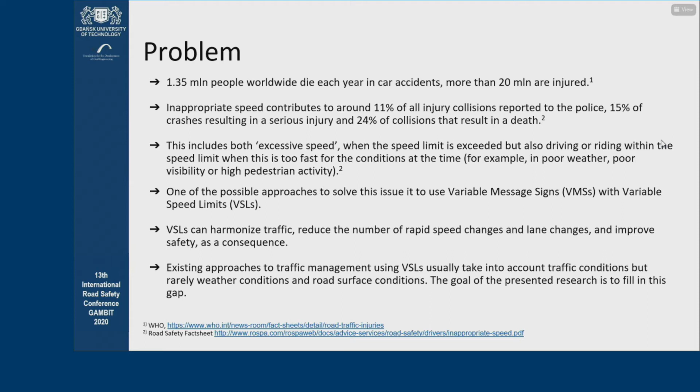Existing approaches to traffic management using VSLs, well, at least the best methods, usually take into account traffic conditions, but they hardly ever include weather conditions or road surface conditions. And so the goal of the research is to fill in this gap, meaning producing a method to help reduce speeds as a result of the weather or traffic conditions.

Right, the methodology. There are two phases. First of all, we have to identify where such messages should be placed. And once they have already been installed there and the detectors are in place, then we have to manage these speed limits using adaptive control.

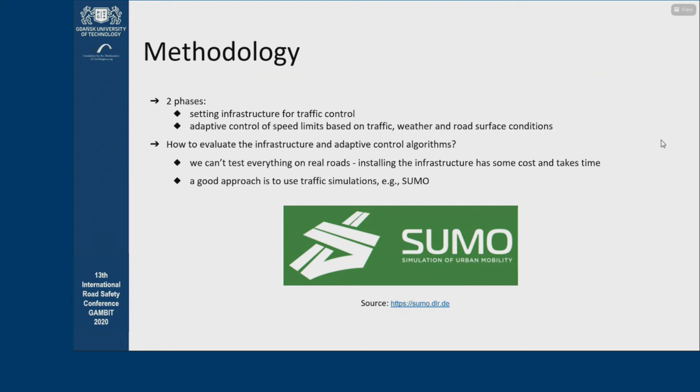So how can we evaluate this? Obviously, we cannot test everything under real conditions. That's costly and possibly dangerous. But one good approach or a standard is to use traffic simulation. And the simulation environment I used is the SUMO software, which is an open source software.

Adam mentioned that too. So how can we propose speed limits, or how do we make our decisions on where to locate variable speed limits? There are several things to include. Just as Adam said, our job is also to set the distance, which would be a safe distance.

So, for example, we have the average distance between vehicles, where we look at vehicle density and average vehicle length, these are things we can measure using detectors, and then restricted visibility, and then response time from the driver when there is an incident, maximum deceleration in the braking.

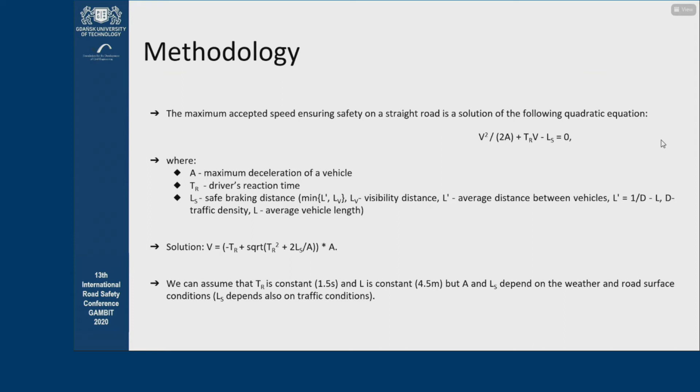So using this and the formula, we can determine the maximum speed at which we can be moving in a specific place to be able to stop the vehicle over a specific section, given the traffic conditions, whatever they are. So, well, response time could be constant, or average vehicle length could be constant, but deceleration or safe distances for braking, well, that could depend on the weather and the road conditions.

Things can get even more complicated when we're driving on a curve, because it's about friction, and also there are different speeds, especially when you look at the radius of curvature. And you also have to include friction. So that's how we can define the maximum speed.

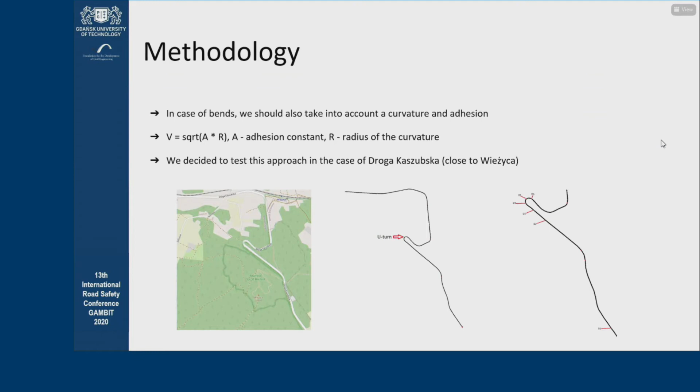So I ran an experiment on a road section. This is the Droga Kaszubska road near the village of Wieżyca. What's characteristic of that road is that it has several straight sections where you think there is no hazard, but there's a pretty sharp curve marked as U-turn here. We can put up several detectors and several variable speed signs, and then apply the method that I've explained.

Once we know the default initial maximum speed for the vehicles, well, under pessimistic conditions, where vehicles are going at maximum speed, and then looking at the curvature and the roadway conditions, we can then determine the maximum safe speed on the curve.

And then, using standard formulas, we can calculate the safe braking distance, starting from the initial speed given the road conditions, and we want the vehicle to reduce its speed to a speed that is safe on that curve. Well, the radius of curvature here is 25 meters.

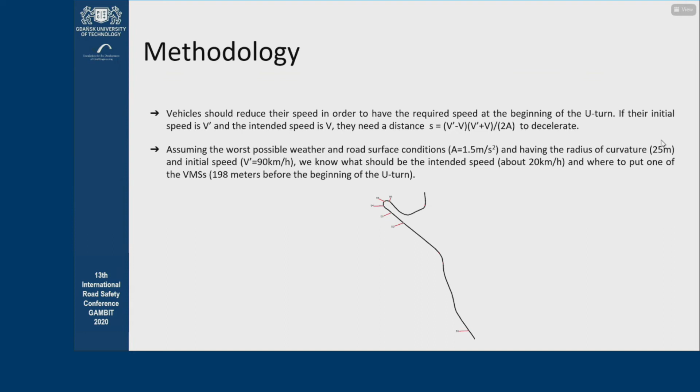And I worked based on pessimistic conditions, the worst possible conditions, so with snow cover. And so it was a equal to 1.5 meters per second squared. So the speed should go down to 20 kilometers per hour from 90 kilometers. And so using the formula, it shows that the vehicle should start braking around 200 meters ahead of the curve.

Now, if they start braking 200 meters before the curve, this could be quite a sudden action, and again, could be dangerous. So to ensure safety, this could be more of a phased-out process. So they should first go down to 60 kilometers, but between the beginning of the curve and the first variable message sign, there should be an additional sign, and our calculations tell us it should be 82 meters from that sign. At this point, they should slow down to 20 kilometers per hour.

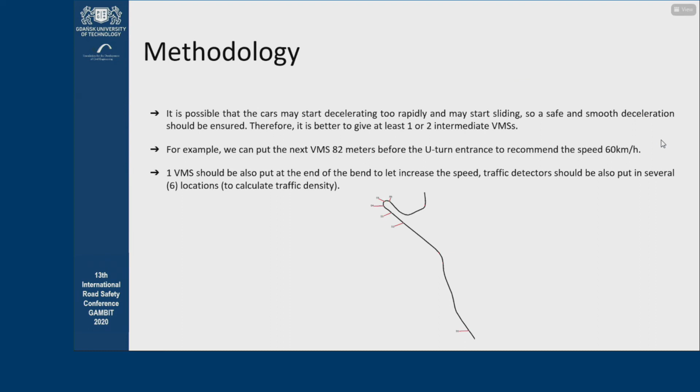There should be an additional variable message sign at the end of the curve so that they can resume the speed which is right for the traffic density. And we also need detectors in the 3 places where we have variable message signs, and in 3 control points, which is at the beginning, at the curve, and at the end of the section.

So we used the SUMO program. We analyzed different weather conditions with snow, and we also looked at normal conditions, so it was snow, rain, and normal. We also tested different traffic conditions, looking at density from 400, 800, and 1,200 vehicles per hour. For each case, I conducted 20 simulations when the control system was enabled, and 20 times with the VSL disabled.

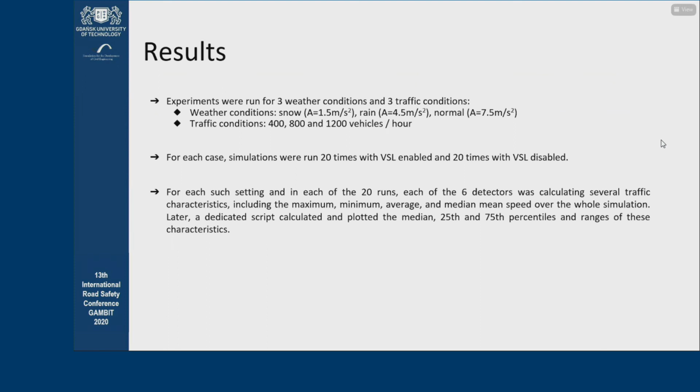Each detector calculated speed throughout the simulation. We then had the minimum, the mean, and the maximum speeds and the median. And after we had had 20 runs, we were able to see the deviation of these values, both from maximum, minimum, and mean. So we had 54 charts, 6 detectors, 3 weather conditions, 3 traffic conditions.

Well, we were able to see the differences, the speeds under different conditions. What would be the speeds if there were no systems to control the speed, and what would be the speeds if the system is there? So at the beginning of the section for detector D1, the differences aren't very big, but then for D5, which was in the very center of the section, the differences could be significant.

And what we find is that when conditions are very bad with snow and very bad friction, 80 kilometers per hour, as suggested by SUMO, could be dangerous. So 20 kilometers per hour, which is what we know from calculations, well, perhaps could be too low. It really depends on what the constant parameters are. But the method can clearly suggest different speeds as opposed to the simulation.

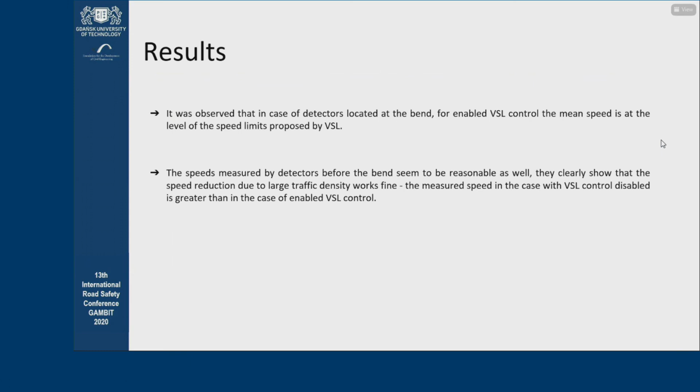So we've had a number of experiments, and what I noticed in the detectors is that the method works in the sense that variable speed limits reduce speed as measured by the detectors. And this is consistent with the speed limits proposed by the system. And the speeds away from the curve also showed variable speeds depending on traffic volume, which suggests that the method should be viable, especially using the Krauss model.

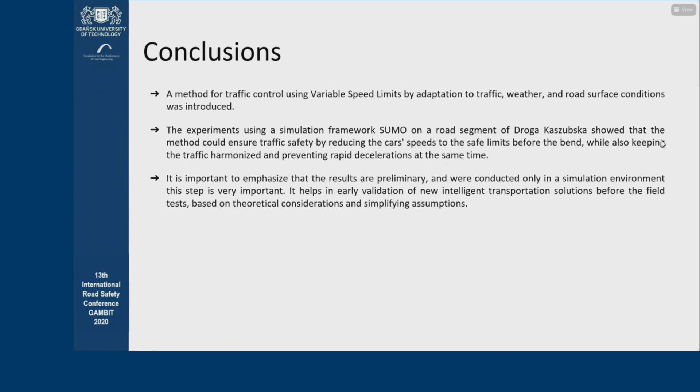And it's obviously based on specific assumptions, and it seems that it would be a good idea to develop and improve the method. But we do understand that these are just initial results, and the experiments were conducted in a simulation environment. And certain values were default values. They were not calibrated using real data regarding the road Droga Kaszubska. So clearly more work needs to be done before the method can be applied in practice.